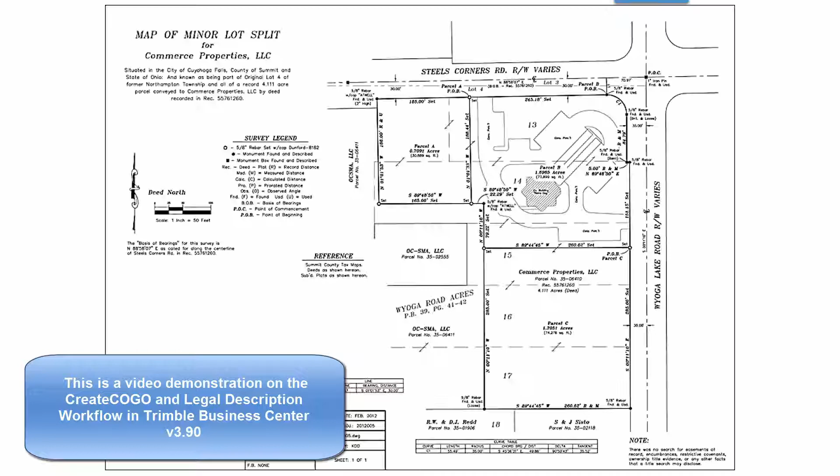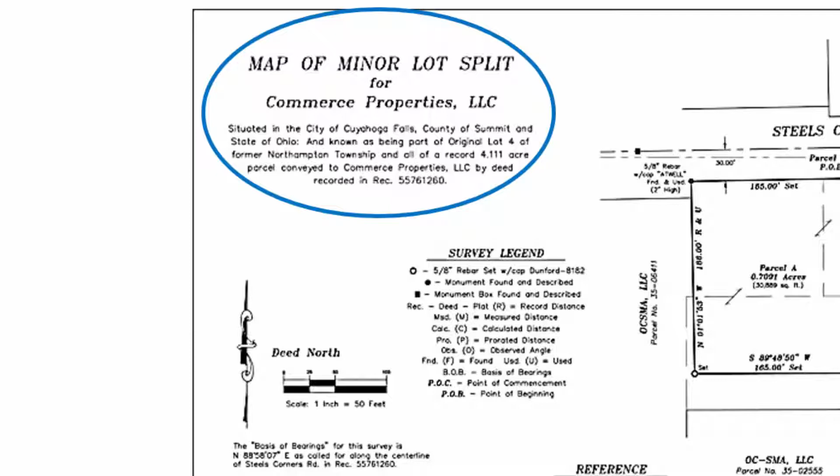Typically, in the cadastral workflow, focusing on the North American area, a land surveyor will start with a survey plan or deed similar to this one here. On this survey plan, there's various information such as the property information, who owns it, the deed number, the acreage, as well as legend for the survey information such as the type of monuments and what the different abbreviations mean.

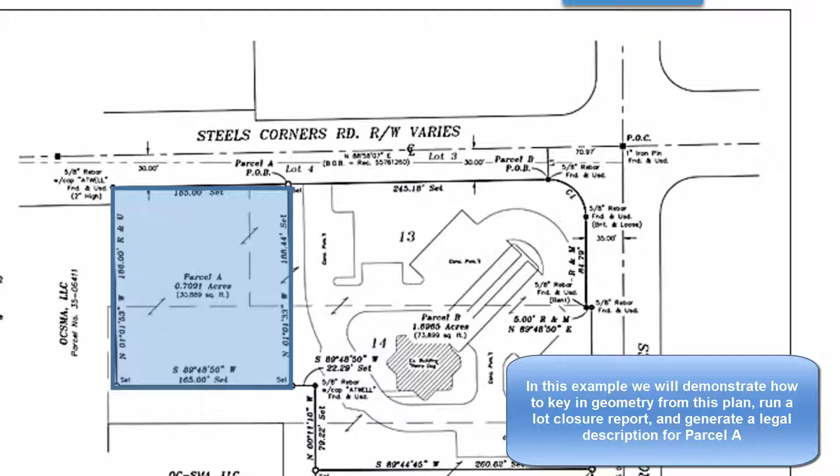As well as north arrow, scale bar, and other typical title block information. In this case, we're going to focus on Parcel A here, highlighted in blue. The surveyor will pull this plan from record, trace out the information that the last surveyor or the most recent survey plan states for this parcel, and will then perform a lot closure report, take this data to the field, physically survey the monuments, perform any calculations necessary, and will generate a legal description for that parcel.

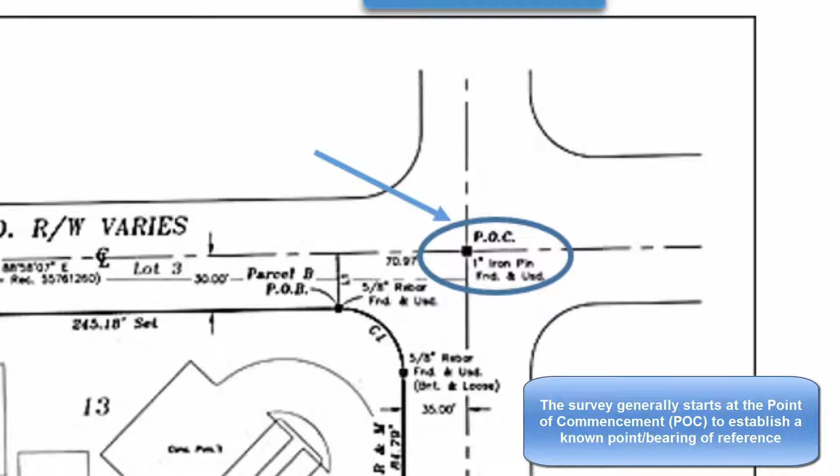So to start this procedure, first we find the point of commencement, or the POC. You can see that here highlighted in the blue circle. The point of commencement is the object or the point from which all other survey boundaries and properties on this particular plan are referenced to. So when a surveyor retraces any property on this survey plan, they first start with the point of commencement to establish a known reference or bearing to use in reference for the parcels that they are surveying.

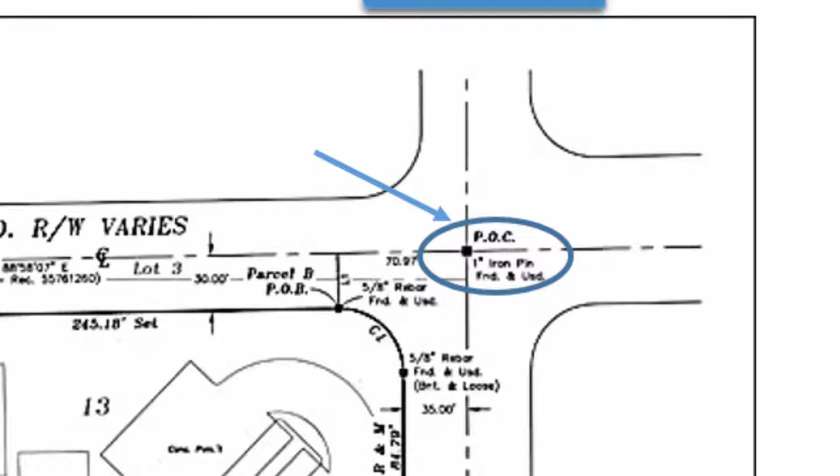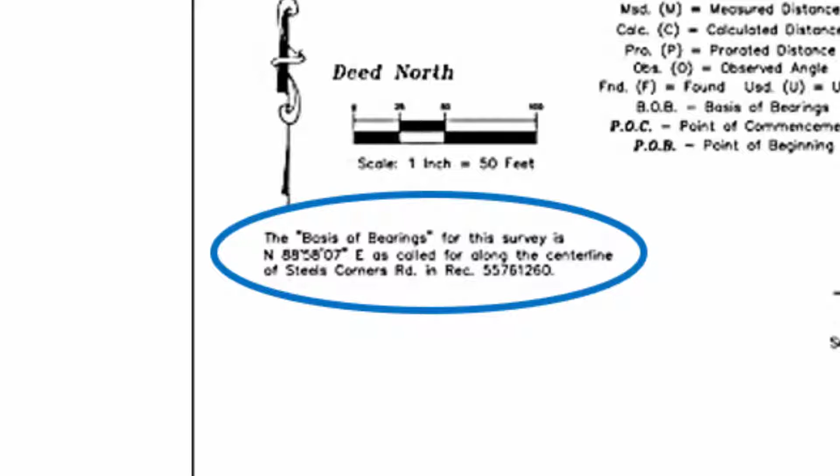In this case, we can see it is a 1-inch iron pin that was found and used. Next, we use the basis of bearing that's stated on this plan as being 88 degrees, 58 minutes, and 07 seconds at a northeast bearing, the POC along the center of the road marks on Steels Corners Road.

To do this in TBC, first we'll open up the Create Cogo command, which is under the Survey tab, under the Cogo group. We will create a new Cogo collection. I can call this Parcel A. I can put this on a specific layer if I'd like. If I hit spacebar, it'll open the layer manager. I can call this layer my Cogo layer, and I'll change the layer color.

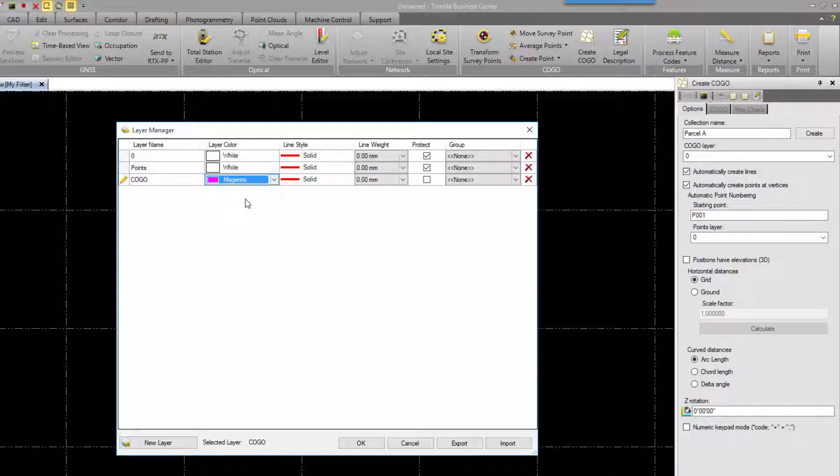There's several options here. In this case, I'm going to use ground distances, which is what's specified on the plan with a scale factor of 1, and no rotation, and I'll press create, and this has created a new Cogo collection called Parcel A.

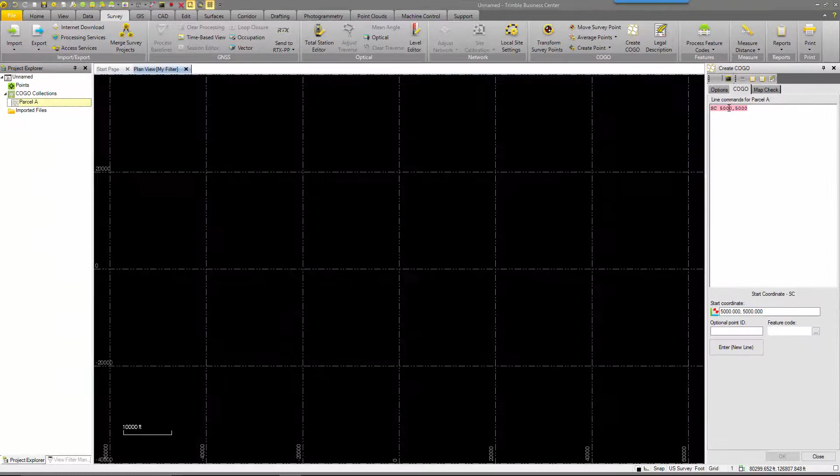Now I'll switch to the Cogo tab where I can enter my point of commencement or my starting point. So I'll use the start command for start coordinate, or SC, and I can specify a coordinate value in the text editor. I will use the typical 5,000 and use this as my starting point. Once I hit enter, it'll use that starting point as my project center. I'll press OK, and now I can see that P001 was created.

I'll change the background to white so we can see that easier. Next, now we'll trace out the first line from the point of commencement on towards Parcel A. And this line here is along the center of the road at 70.97 feet at a bearing of 88 degrees, 58 minutes, 07 seconds northeast.

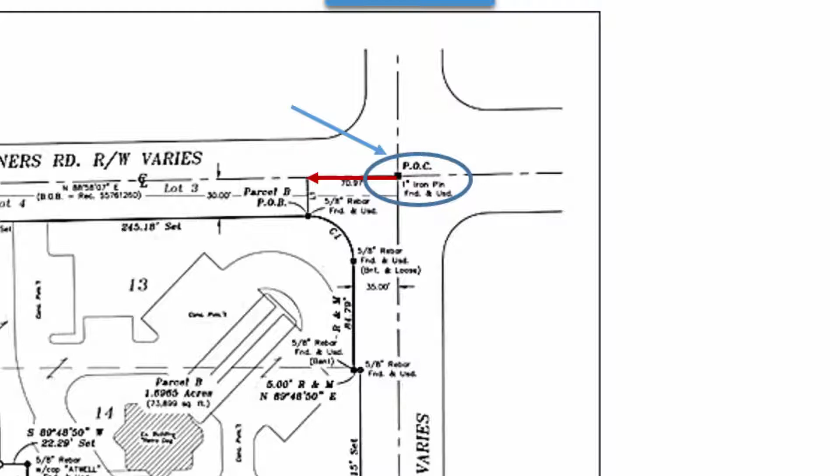So in TBC, we can do this by either typing in the LB for line by azimuth command, which will automatically bring up the line by azimuth entry point here, or I can type in the text editor LB and continue to type my bearing. One key feature with TBC is when using azimuths and bearings, to convert from a bearing value to an azimuth value, simply enter the quadrant of the bearing first.

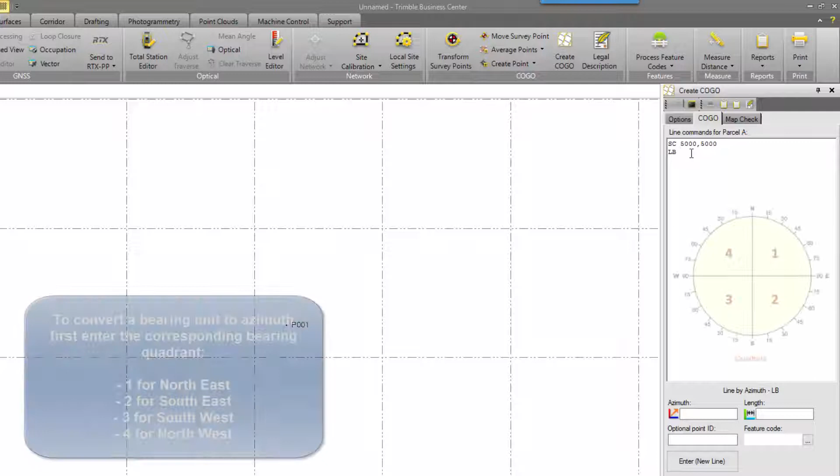So in this case, we're going to proceed into a southwest direction, which is the third quadrant. And now I'll type bearing, so 88 degrees, 58 minutes, and 7 seconds, comma, and then put in the distance. In this case, it was 70.97. Now if I zoom extents, you see I'll have a line created. First line has been generated.

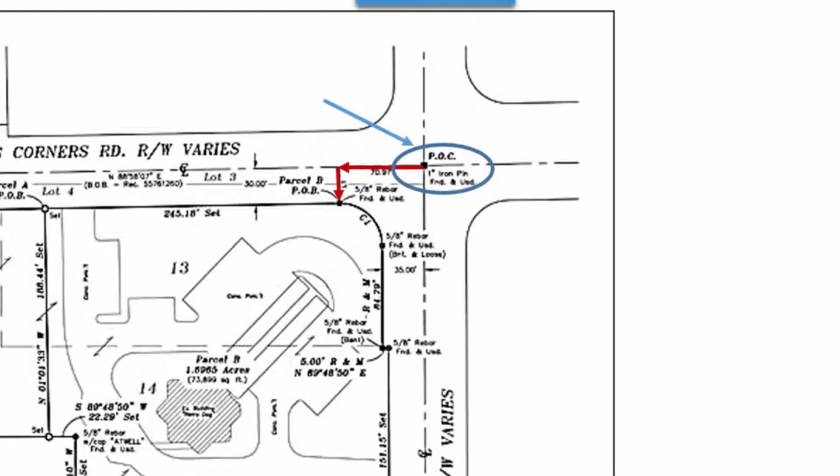Next, we have to jump from the center of the road to the first parcel, Parcel B. So this is a 90-degree turn, essentially an offset from that center line of road at 30 feet. In TBC, we can use the line by left 90-degree angle to turn 90 degrees and produce a distance from the last point, which is the LL command.

This requires only a length value, so I'll type in 30 feet, press enter, and now we have our next value. The next line is to trace along the north border of parcel B at 245.18 feet to the point of beginning, or POB, of parcel A.

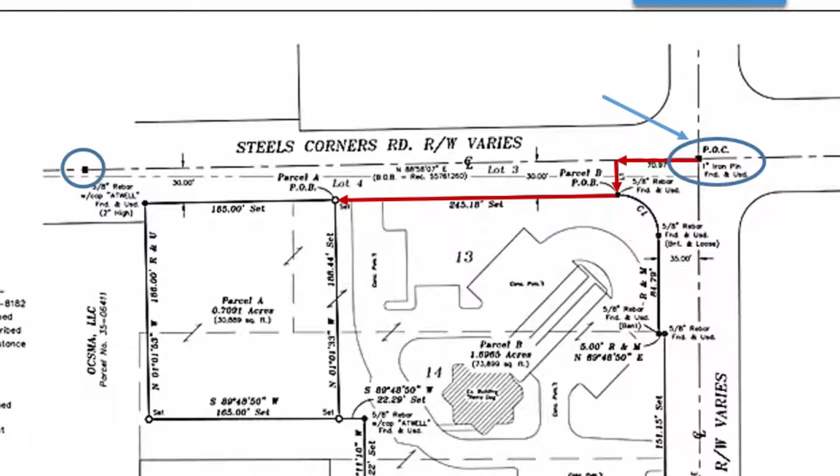I can use the line by right angle command to do a similar task as before. In this case, it was 245.18 feet, and this will create a line at that distance and bearing. I was able to do this because this parcel line is parallel to the center of the road, so it holds the same bearing.

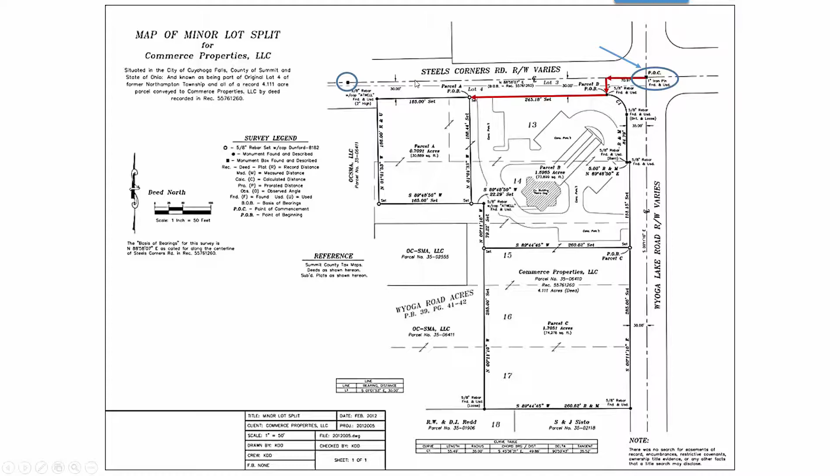Now we've reached the point of beginning for parcel A. As you can see, POB is stated here at the northeast corner of the lot. Now we can trace out the four boundaries of this parcel.

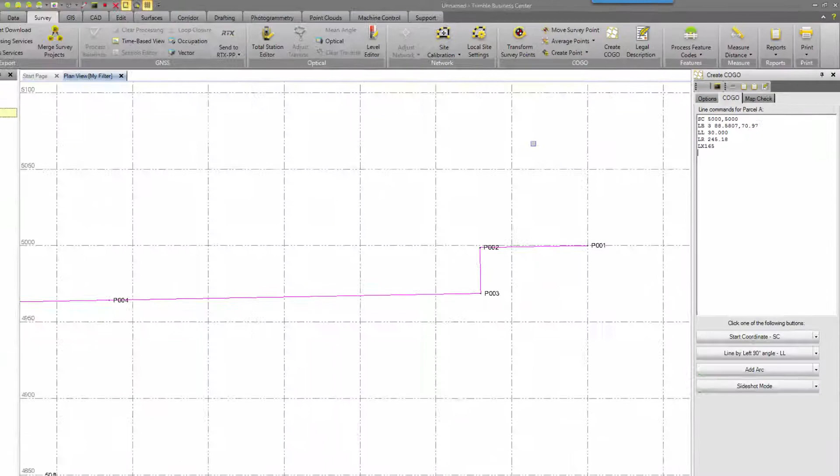We'll start with the north boundary at 165 feet along the same bearing as the previous line segment. To do this in TBC, you simply type LX for the line extend command, which takes the previous line's bearing and applies it to this line. All the user has to do is specify a distance — in this case, 165 feet — and press enter, and a new line is created.

The next line specifies the west boundary of the parcel. This line is at a bearing of 1 degree, 1 minute, 53 seconds in the northwest direction, so in our case it'll be southeast as we're going down, at 186 feet in length. I'll use the line by bearing command to specify the bearing, going in the southeast direction, which is the second quadrant, at 1 degree, 1 minute, 53 seconds, 186 feet. A new line was created.

Next, we'll create the south boundary line using the line by bearing command again. We'll specify the northeast bearing, going in at 89 degrees, 48 minutes, 50 seconds, at 165 feet.

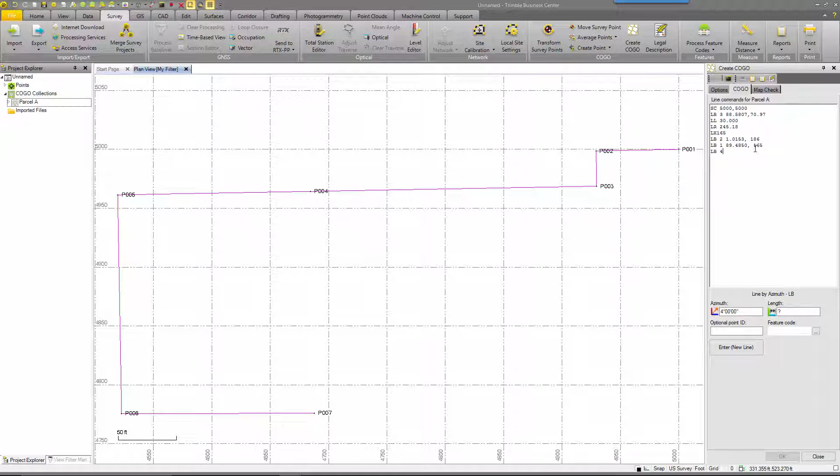Finally, the last boundary line on the east side we'll create in TBC. Once again, the line by bearing command is perfect for this. The fourth quadrant is where the bearing is located, at 1 degree, 1 minute, 33 seconds, 188.44 feet.

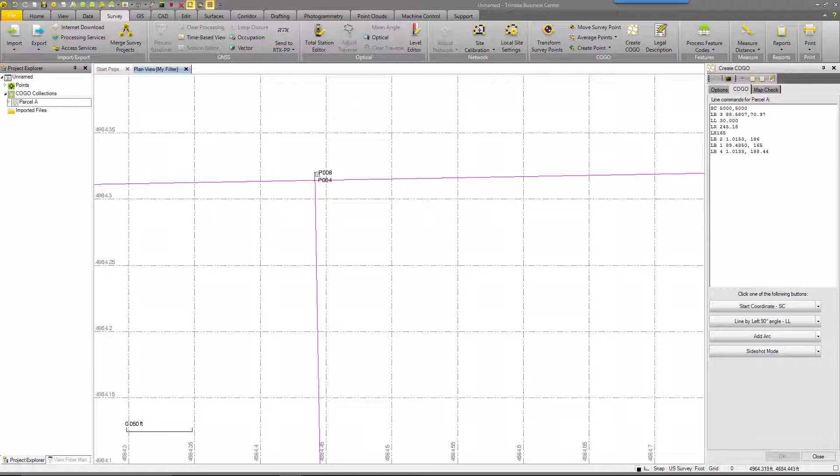Now we've entered all of our line work to generate parcel A from the plan. If I zoom into this corner, there's a small difference between the starting and ending point for parcel A. This is what we're looking for when we generate a lot closure report.

Now that we have all the line work keyed in for the parcel, we can generate the lot closure report, or the map check as it's called in TBC. To do this, go to the map check tab in the Create COGO command. You can specify a layer for your parcel — in this case, a parcels layer.

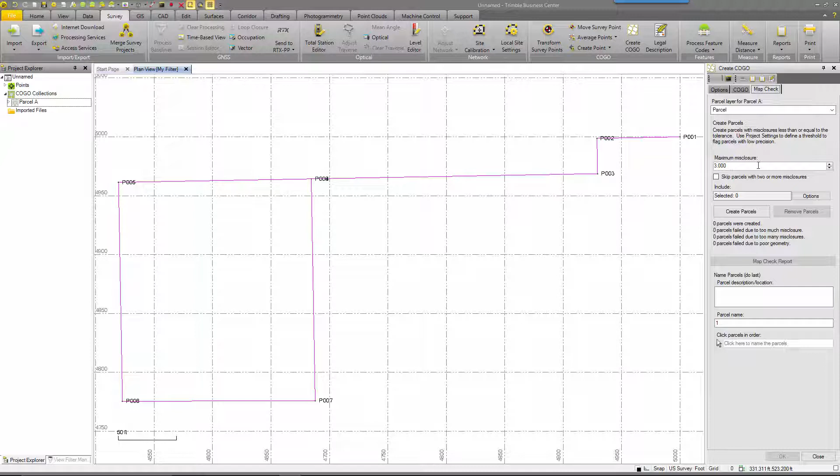Specify a maximum misclosure — in this case, 3 feet. Any parcels with a misclosure greater than 3 feet will not be created. Then click Create Parcels. This generates a parcel object based on the line work from the Create COGO collection.

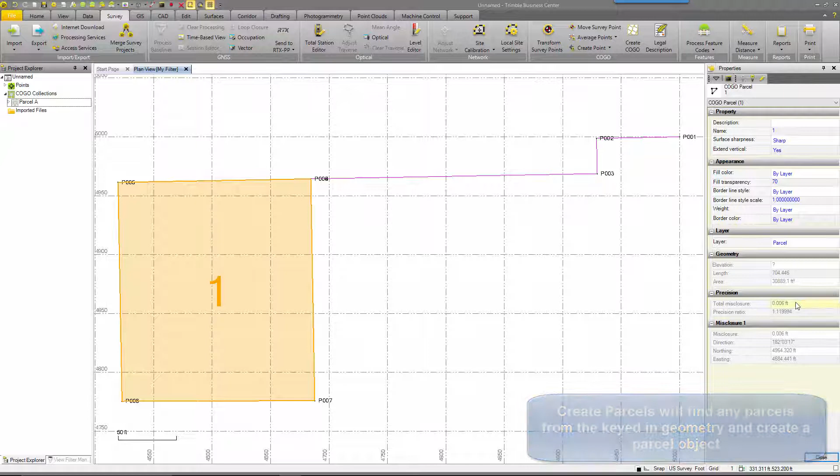I can select parcel 1 and view the properties. In the properties, I can see the precision ratio as well as the total misclosure and where that misclosure was located. I can also generate the map check report.

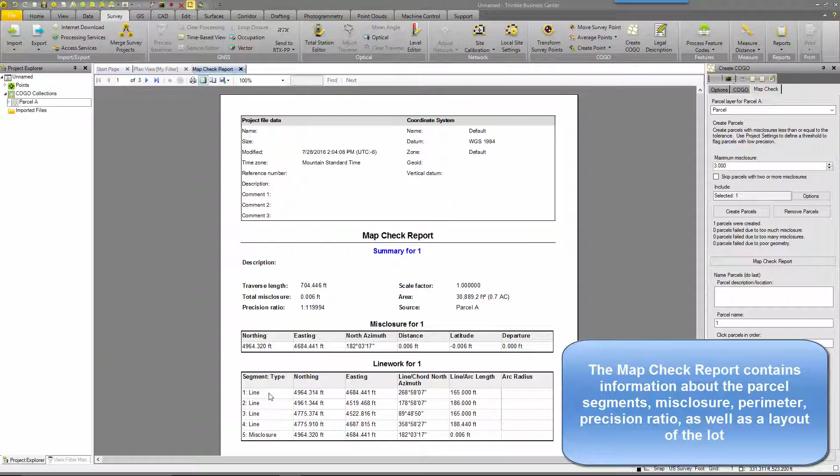Here's the map check report that was generated. You can view things like the total length of the parcel — the perimeter — the misclosure, the precision ratio, scale factor, as well as tables showing the specific line segments and arcs that make up the parcel.

On the second page, there is a layout view of that specific parcel with a scale bar and grid axes. You can also export this as an Excel, PDF, or Word document.

You can also use the Create COGO command to rename the parcel. In this case, our parcel was called Parcel A. We can also give it a description.

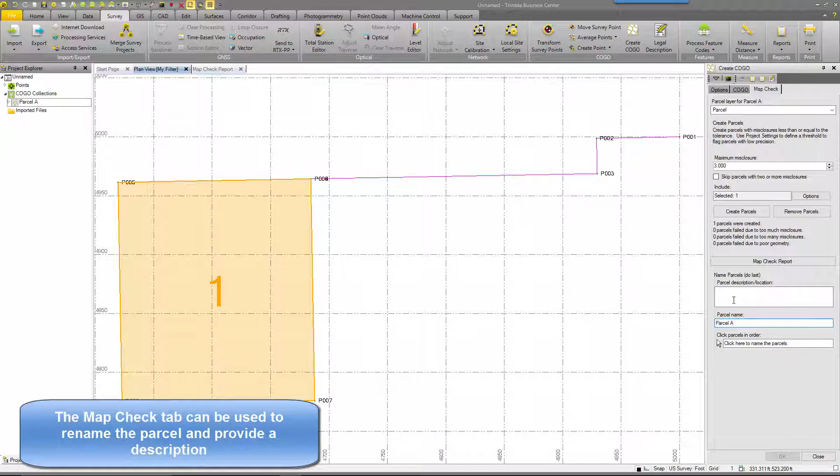If I had information like the township — let's say township 44 — or the range 20, any of that type of information can be put in here. I can also specify, maybe, a subdivision 15, and this will now be associated to the parcel when I click on it.

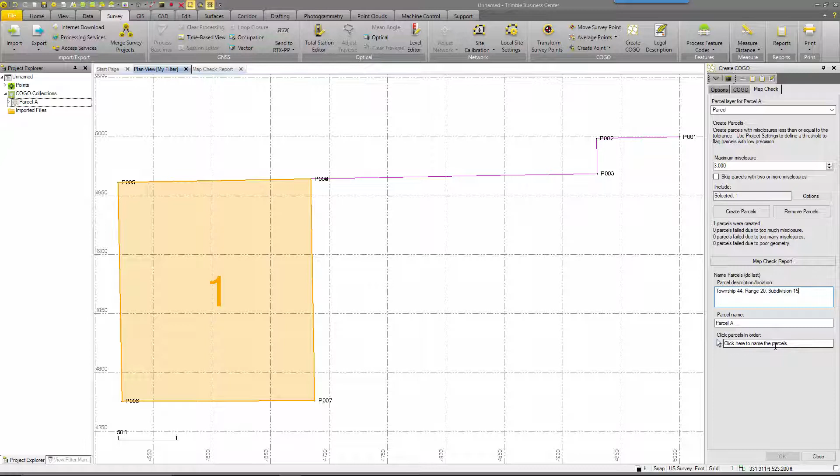So I click the parcels in order, select this, then select the parcel, and it renames it and adds the description as well as the label.

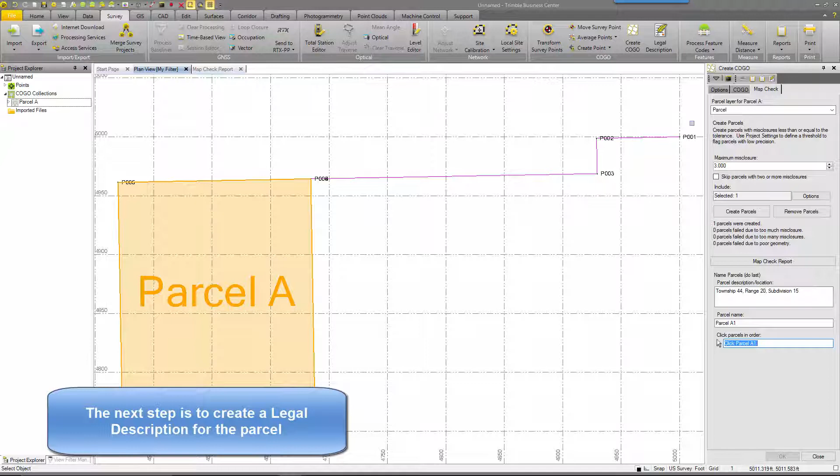Now that we've generated our lot closure report and our line work, we can go on to the legal description writer. You can access that here under the survey tab, and in the Create COGO command there's a shortcut link to it as well.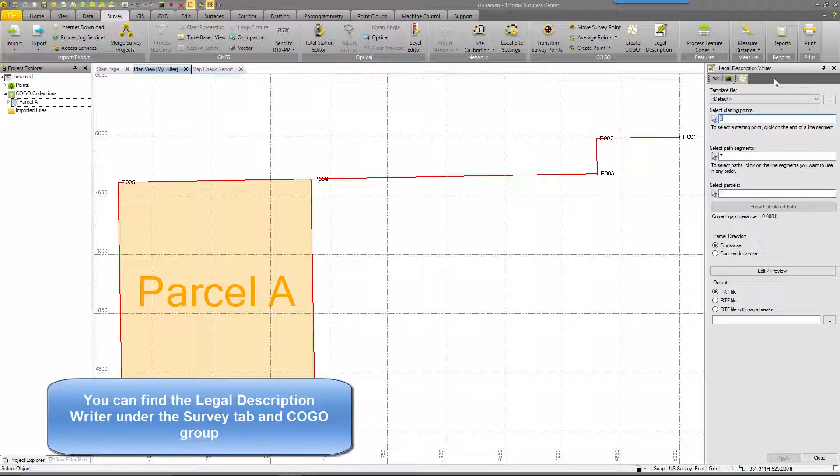Here, what the legal description writer allows users to do is select a point of commencement, in this case the starting point, select the path from the point of commencement to the parcel, and then select the parcel for which the legal description will be generated.

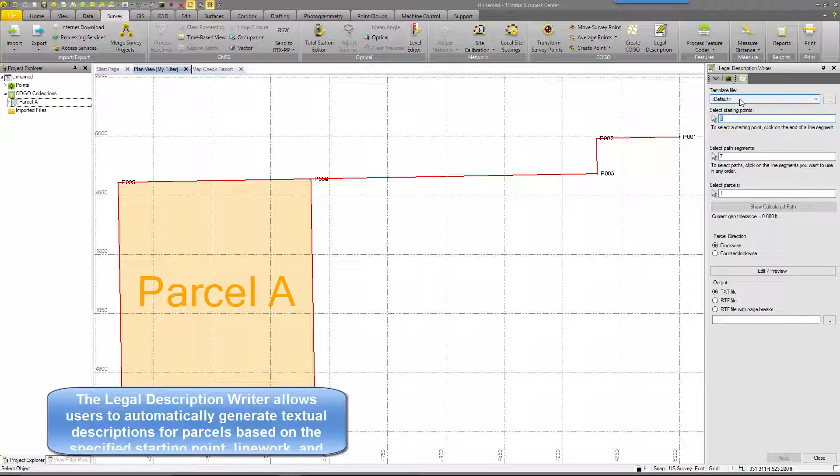This template file allows users to create their own templates that have unique legal description styles based on their county, their location, and other information. These types of legal descriptions can vary depending on the state, the county, or even who you're providing the legal description to, so you can create your own templates and use them in TBC.

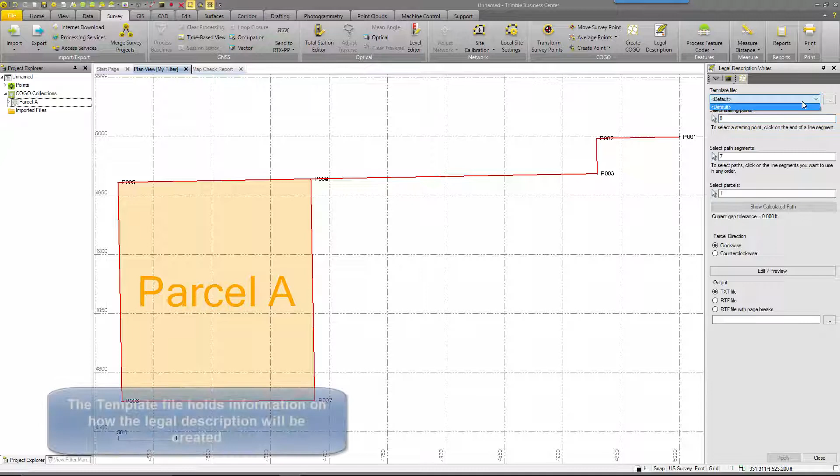Users that install TBC version 3.90 and later will get a default template file installed with that. I only have one right now, but I can also browse to find other ones. In this case, I'll use the default. So now I've selected my template file.

First thing is to select my point of commencement. In this case, I wanted to start with P001, so I can select here, and that will show a red triangle for where the point of commencement is located.

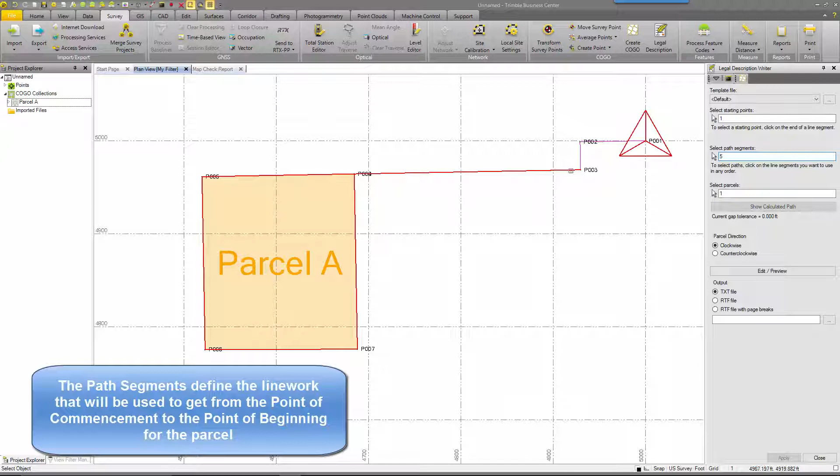Next, I select the path that I want to go from my point of commencement to my point of beginning at my parcel. So in this case, I want to go along these lines here. It looks like I'll clear this selection and then select these lines. That gets me my line to the point of beginning, and you see there's a red highlight to give the user feedback on where the path will be.

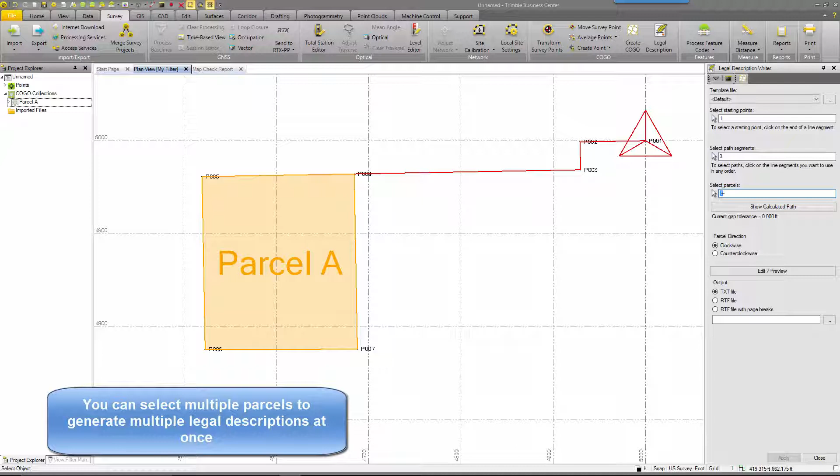And finally, I select my parcel for what I want a legal description written for. So I'll select parcel A.

Now we have a button that says Show Calculated Path. If you click and hold this down, it will show if there's any issues with the current selection for the starting point, the path, and the parcels. As I hold this down, notice it highlights the parcel in red, and there's no issues that show up. If there is an issue, it will show a bright purple circle.

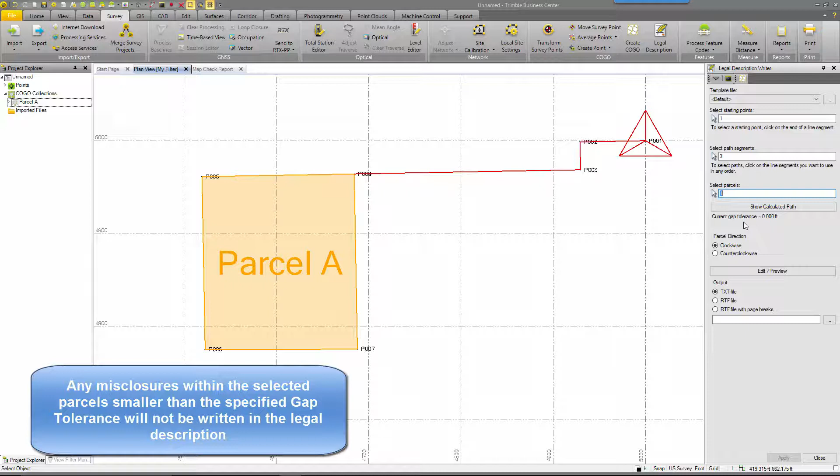We also show a gap tolerance. What the gap tolerance does is allow users to skip any misclosure areas, so the misclosure will not generate a legal description value for it. It will ignore that small misclosure if it's within a specified user tolerance.

I can also specify the parcel direction, so clockwise or counterclockwise. I want to go from the point of beginning counterclockwise around this parcel, so I'll select counterclockwise.

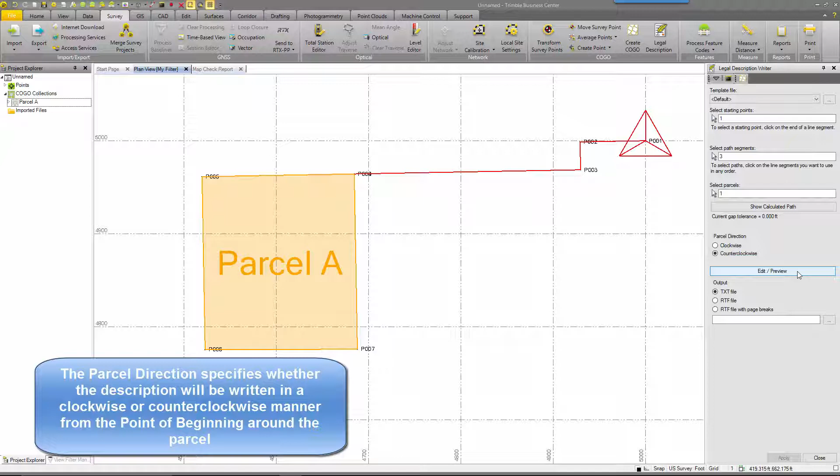The next part, which is a really key feature of the legal description writer, is the edit preview. This is where you can edit your existing template and create new templates. In here are various options for changing the formats for distances, angles, areas, as well as the specific phraseology for different types of lines, arcs, directions, and other information.

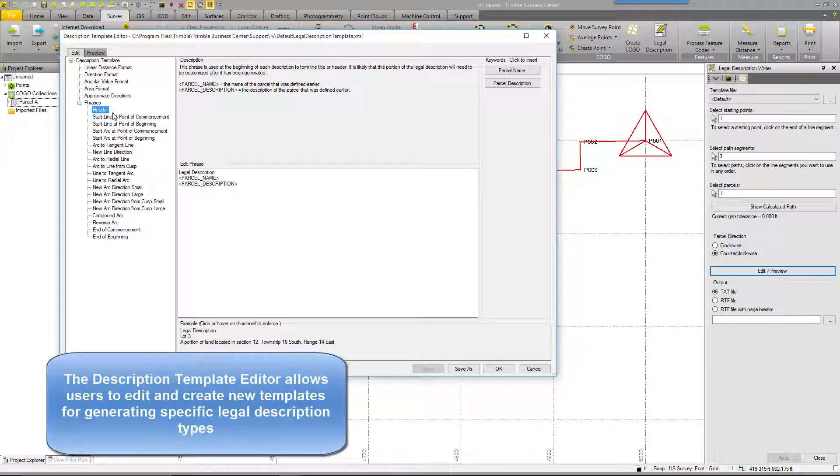If I start with the description template, I can specify a gap tolerance. Let's say we want to specify 1 foot. For linear distance format, I can specify how my distances are formatted in the legal description. For my decimal precision, maybe I only want 1 decimal place.

At the bottom we have an example, and this is a dynamic example, so as I change the format, this updates. In this case, if I change the decimal precision, notice that that changes below as well. I can change the units as well.

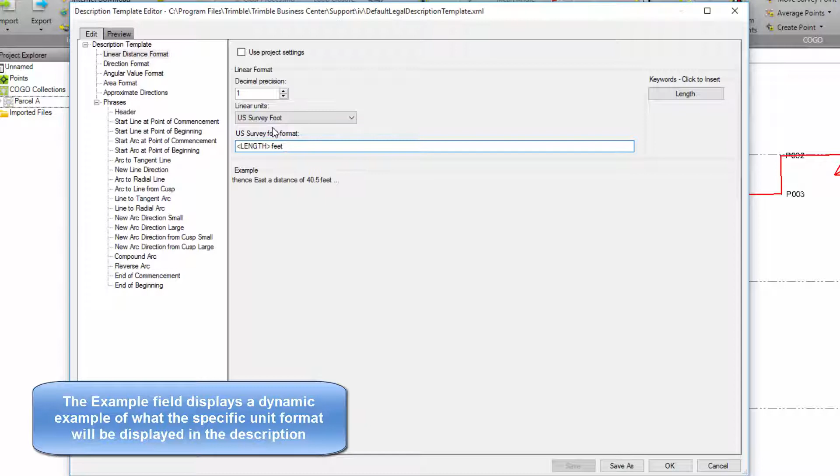This is where I can change the actual text. If I didn't want to specify feet with the whole word, I could erase this and just put FT, and that would change here as well.

On the right hand side, you can see keywords. These insert the keywords which are noted in the brackets. In this case, we have a keyword of length, so when the legal description is generated, it will replace the keyword with that value, which in this case would be the length of the line segment.

If I want to insert a keyword, I click the button and it'll insert a new keyword, and it'll show that in the updated example below. In this case, I don't want that, so I will erase it.

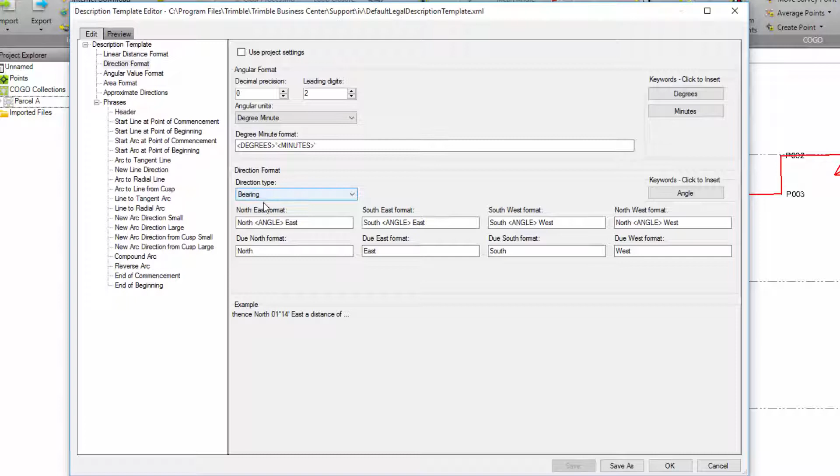If I continue on, I can see there are similar windows for each of the other values, such as directions, angles, and area. I can change those from angular units, change to degrees minutes if I didn't want degree minutes seconds, as well as the direction format for bearings. I can view the angular areas as well, and I can specify how the areas are stated.

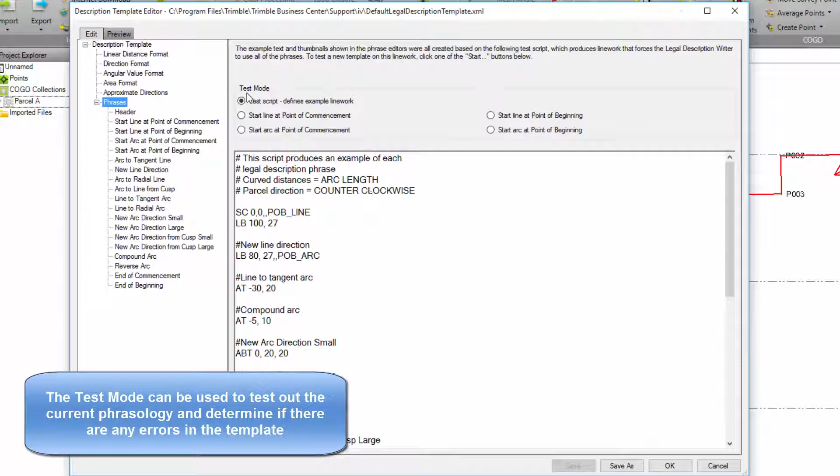And approximate directions for northeasterly, northwest, and next we move on to the phraseology. Here's an example of what the legal description would look like. I can use this test mode to see if the legal description will be created correctly. So if I select start line at point of commencement, it will give me an idea of what all the phraseology and all the formatting that I've specified will look like for the parcel.

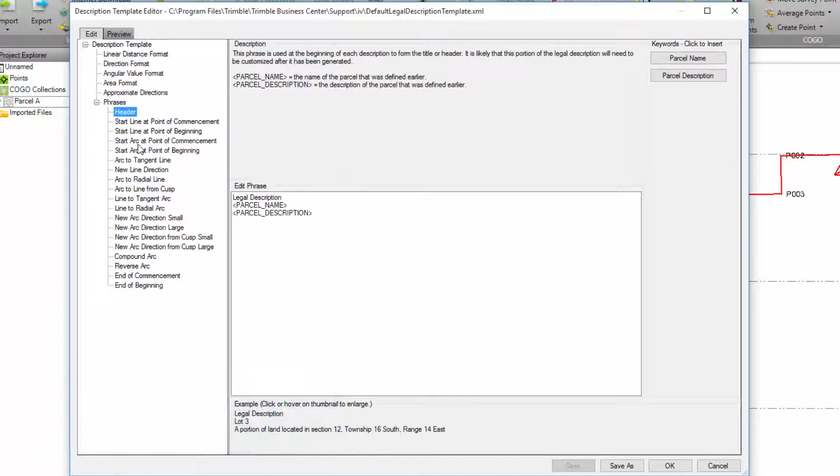Next, I can move on to all the different phrases. So we can have a different header style. So in this case, I have the legal description, and then I have keywords for the parcel name and the parcel description. Let's say I want to change this to legal description for Commerce Properties LLC. And that updates as well in the dynamic window below.

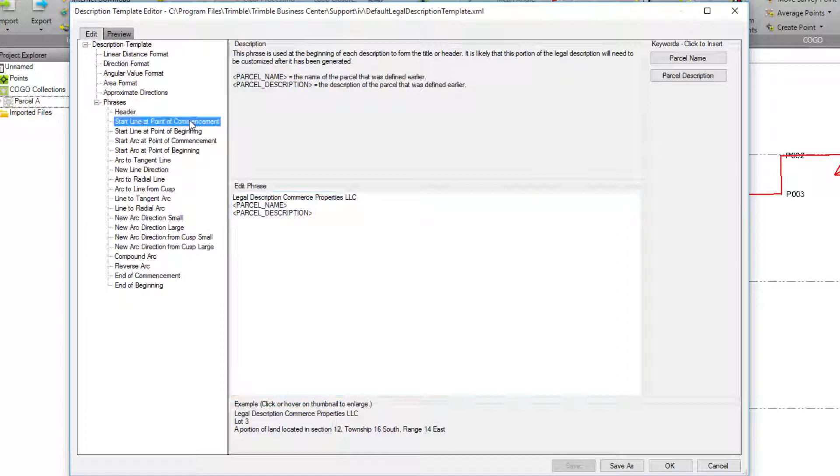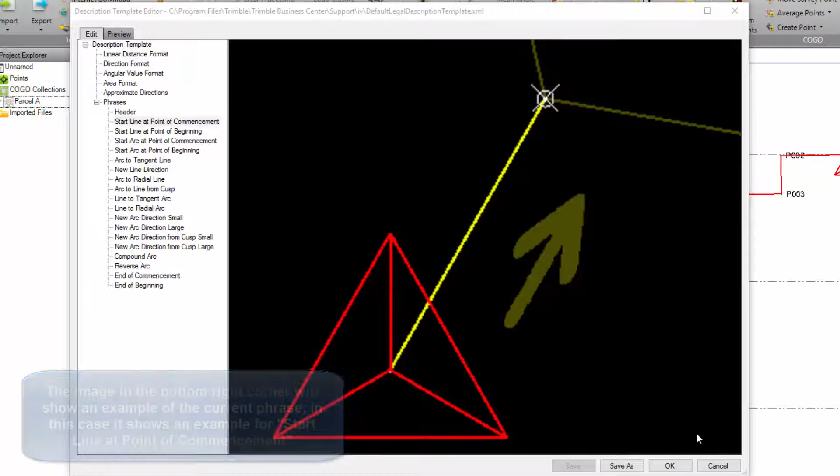There's also various options for the phraseology for point of commencement and point of beginning. In this case, notice at the bottom right there is an image window. If I hover over this, it will enlarge the image to show an example of what start line at point of commencement is. So in this case, it's a single line segment from the point of commencement to the parcel or on the path. If I move off that, it shrinks back to the regular size.

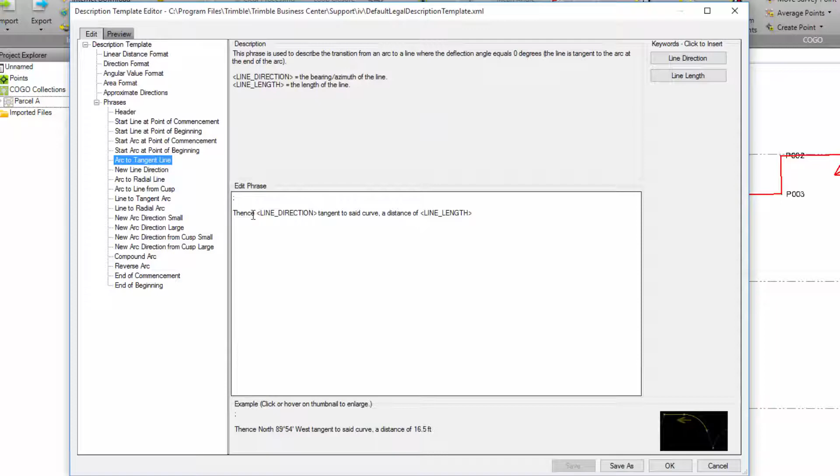This is similar if I go to the start arc at point of commencement. And see, now I can view point of commencement is starting on an arc. I can move down all the phraseology and change for different items such as an arc to tangent line, new arc direction, small. I can also view in the window what that example may look like.

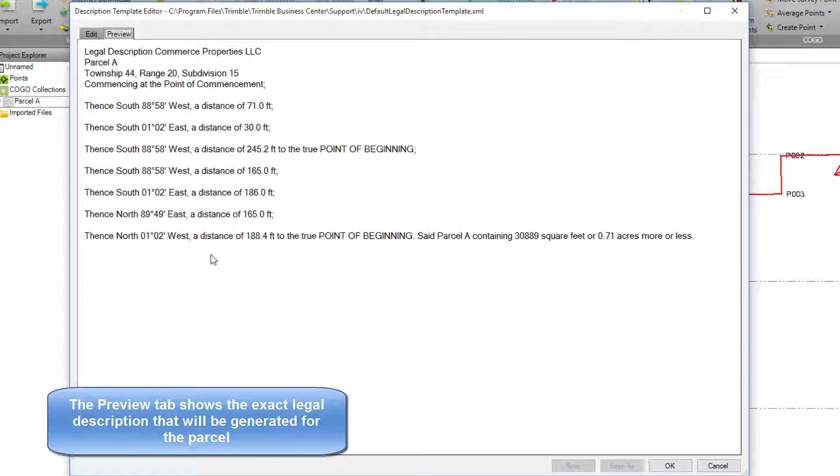Once all the phraseology is set up, you can go to the preview tab here, and this will give you the exact preview of what your legal description will look like when you generate it for the selected starting point, path, and parcels. So I have my header that was changed to legal description, Commerce Properties LLC, the parcel A, the information for the parcel description, and then commencing at the point of commencement, and the lines that make up the parcel to the point of beginning, and everything else that finishes off, as well as finishing with the area.

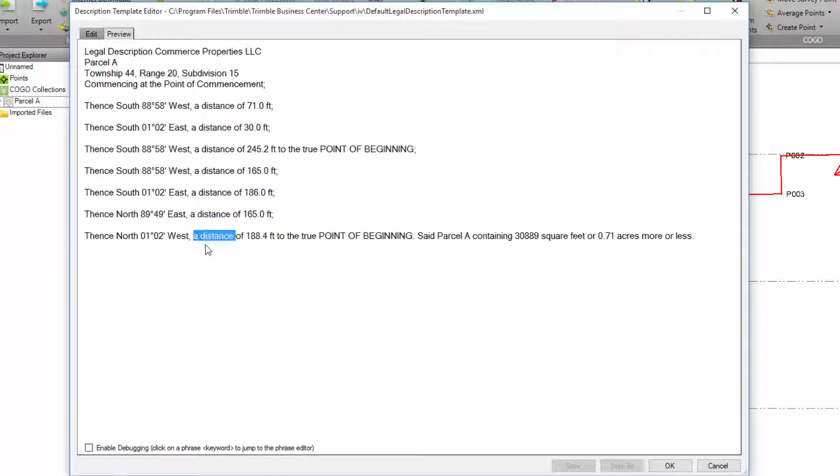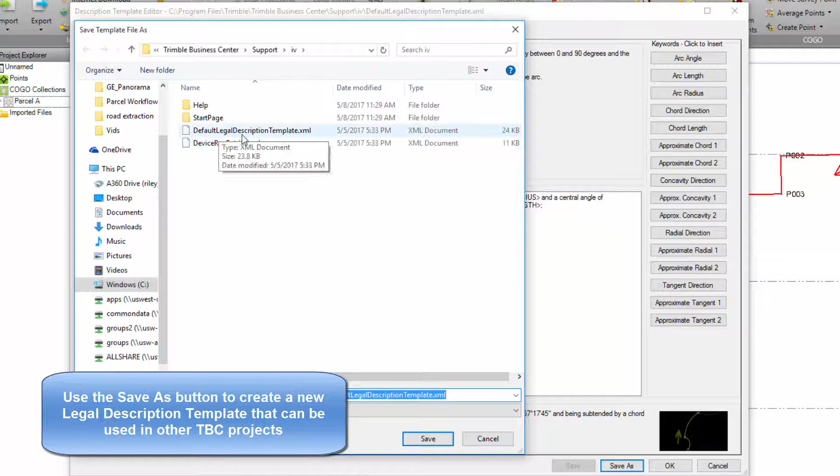I can edit any of the text in this window. I can enable the debugging mode, which allows users to see where the keywords are located inside of the legal description. If I'm happy with this, I can go back to the Edit tab. I can save this as a new template if I hit the Save As button. So this opens up the browser to where our default legal description template is located. So I can create a new template.

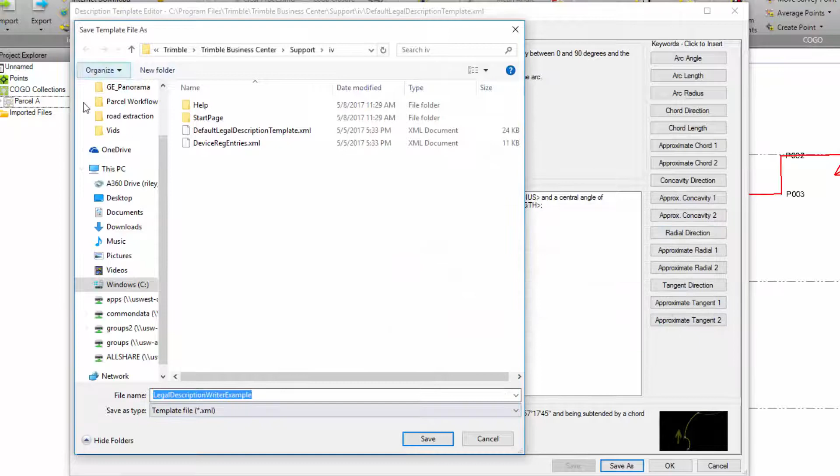Let's say I want to call this one Legal Description Writer Example, and then I'll hit Save, and it's just warning you that you're saving in a location that doesn't have permissions. So I can save it onto my desktop and press OK. And now we're using my new template file. So I've previewed it, I'm good with my legal description.

Now to generate it, I have three formats which I can use: a text file description, which can be opened up in any WordPad or Notepad file, an RTF file, which is a rich text format, which can be opened up in Microsoft Word, as well as an RTF file with page breaks. This is very useful if you're generating multiple parcel legal descriptions at once. So I could select several parcels and create an RTF file that would put each parcel legal description on a single page. In this case, I'll just use the RTF file.

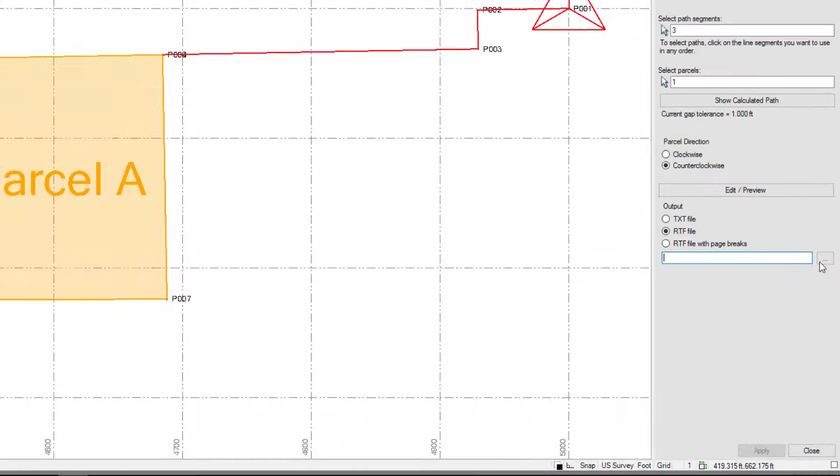I'll specify where I want to save it. We can save it on the desktop. And then press apply. This will open up the legal description in Microsoft Word. It'll ask you if you want to open this as an RTF. I'll say OK. And there's my legal description in Microsoft Word. And I can take this text and put it into any formatting or any type of document format I have for Word.

This concludes a demonstration on the new cadastral workflow in Trimble Business Center, showing off the Create COGO as well as the new legal description writer feature.